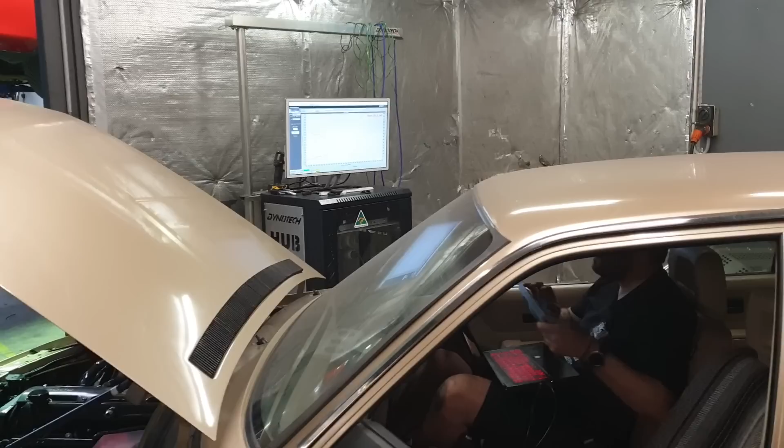That's more than it used to make. She's lean.

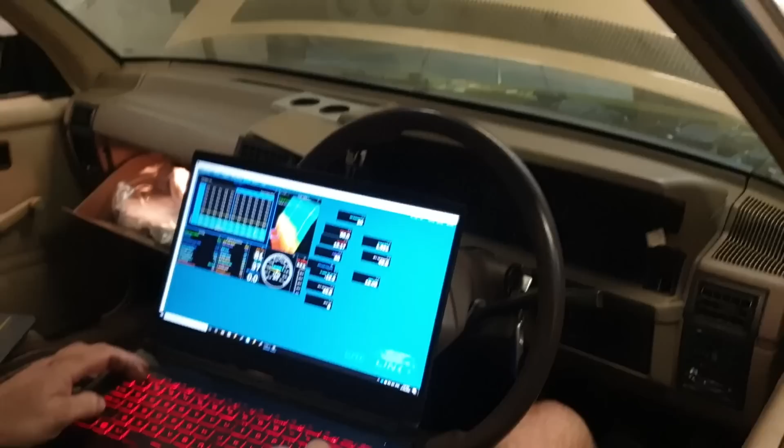Something's hitting under there, right? You hear that?

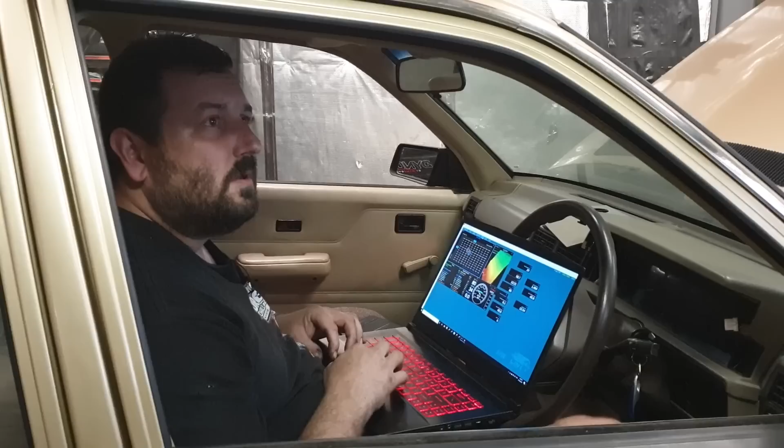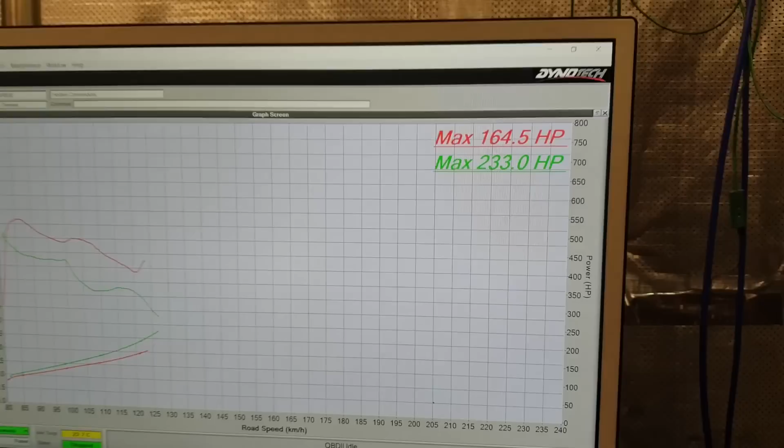What the hell just happened? I think it's like at 14 pounds. Jesus Christ, I didn't expect that. What the f***? I just shit myself.

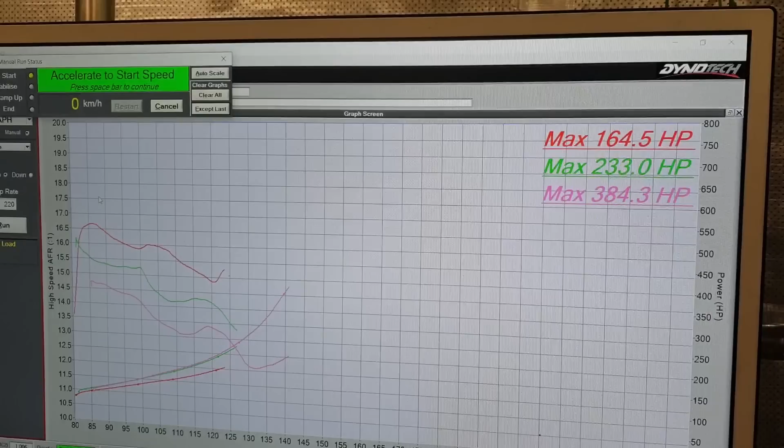Must have like 18-pound springs in it or something. Shit, lean eh? Where the f*** was that going? That was going places, don't worry.

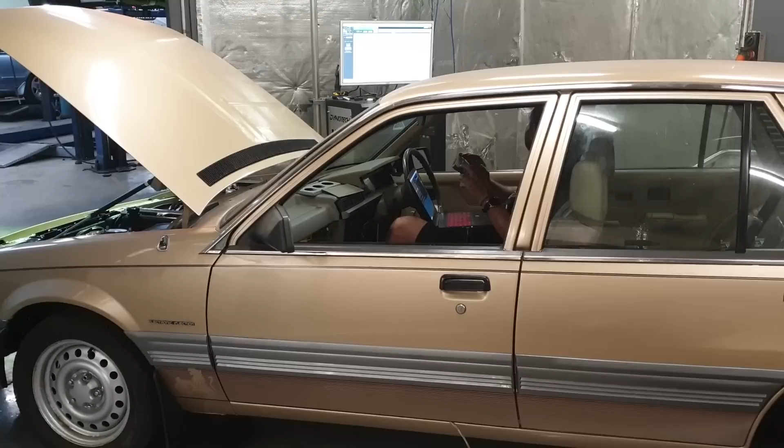Running out of numbers on the map, so I'm just having to shuffle some shit around. It's starting to lean, you know, like - you better go. Only a half one.

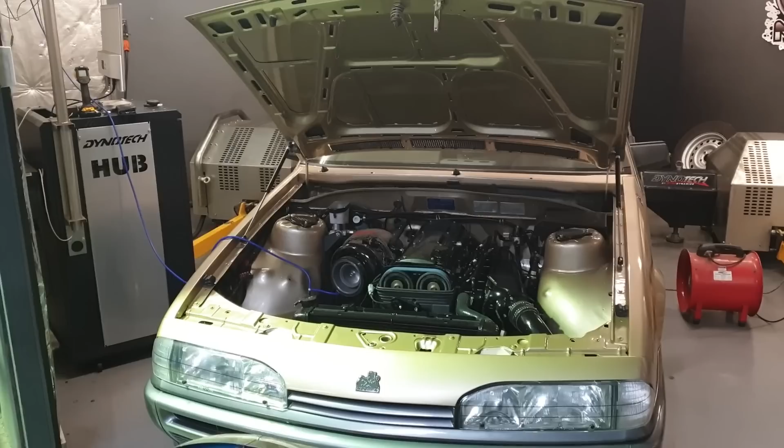I don't know where that's going. Where? Oh, it's stable at 22 pounds. I want to just put a bit more dip in the ignition curve there. It's going places, eh? It is.

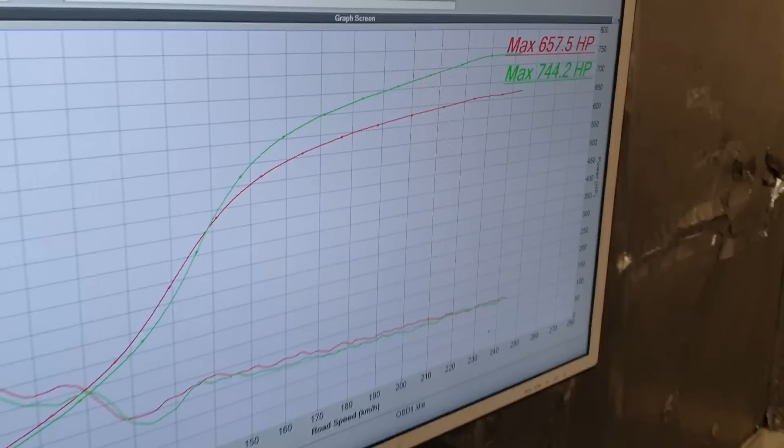That's 22 pounds. 22? Are you f***ing kidding? F***ing serious? Jesus.

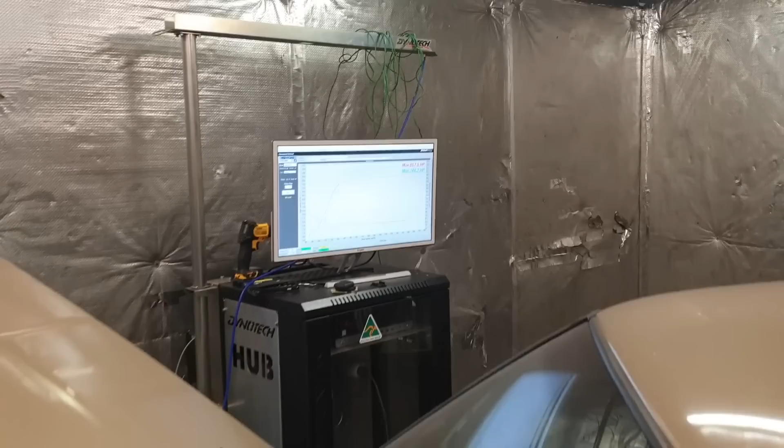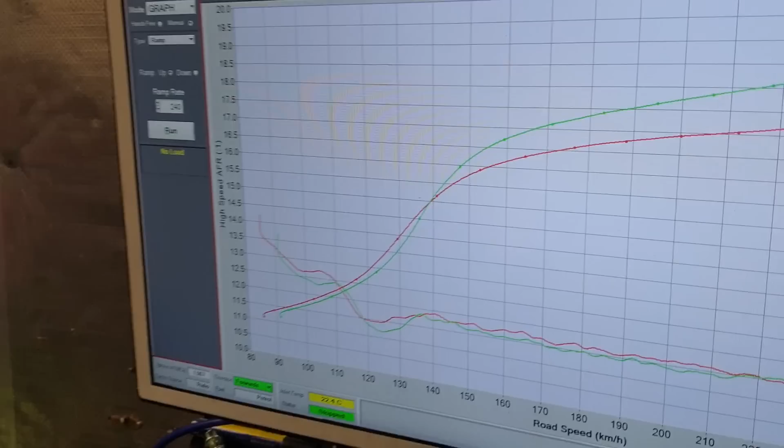What's that? It's not turning anything on. You almost seem disappointed. I'm going to have to bring the boost in a bit slower because it's just smacking the converter that hard. Oh, okay, 22 pound. Sure.

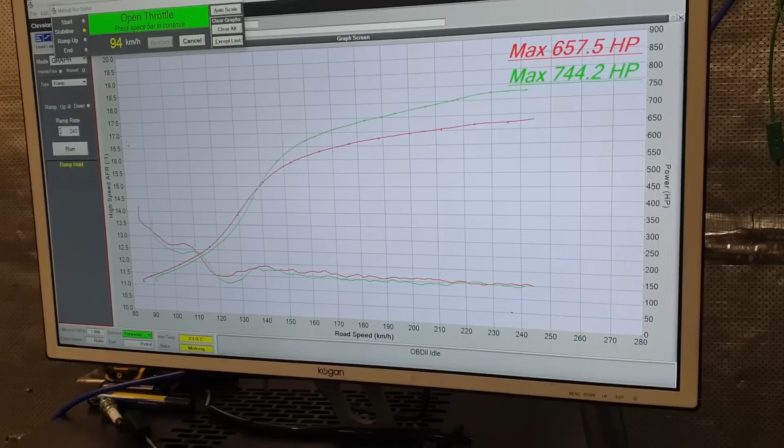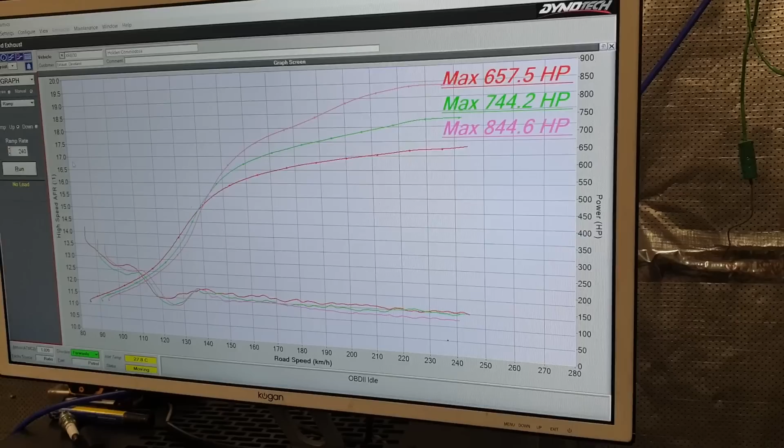Kidding? Shit. Oh, shit.

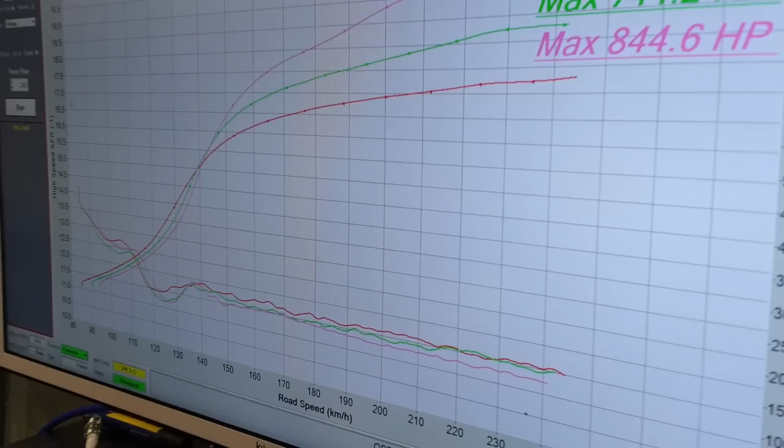How much? 27 pounds. It even hit my target air fuel ratio in open loop, and I brought the boost in slow. I don't want to fucking break it.

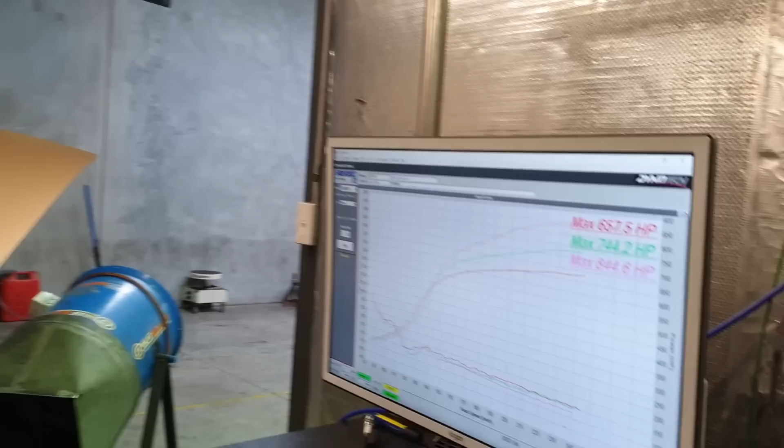That's hilarious, man. Take a log and then might leave it because I don't really like to beat it on the Supra. Oh, that's why we're pulling up.

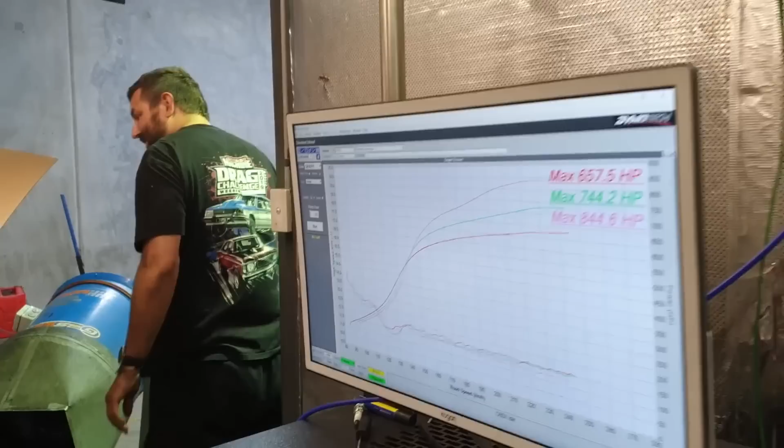Yeah, holy shit. Get back here, you little shit.

Alright, so after all that rod knock, I've caught that little slippery sucker of a rod. We cut it up into little chunks and put it back in the oil cap and kept going. And got to 844 at the tyres. We didn't really intend for it to go there, and it didn't need much boost to do it, so it's pretty efficient. Yeah, I've got nothing.

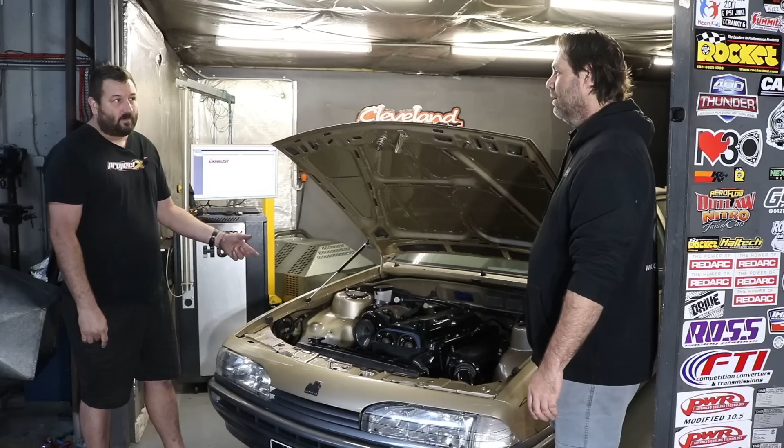At the end of the day, it's a completely stock NA engine. It's got stock ring gaps, stock pistons, ARP rod bolts. It probably would go to 1,000, but it could also come apart as well, so that'll do him for now. That's plenty for a street car anyway.

I got the boost sort of coming in, not all at once, and letting it eat a bit up the top, so it should do it pretty safely.

That noise you're all going on about, it's actually the 1350 uni on the tail shaft not having enough clearance for the bolts. We've already got cut down bolt heads in there, but as you decel and the diff moves to a certain location, it just touches. It sounds bad, but it's not. Sounds worse on camera actually, because the microphones seem to pick it up worse than it is.

Yeah, so I was hearing it every pull, I was making comment about it every pull. Outside I could barely even hear it. I didn't care, it's not my problem. Wow.

All right, so what's next? Well, not the Supra, because that sucks. Fair enough. But there's heaps of little bits and pieces to do to get it on the road.

You've got to put your little tanky things in. Yeah, we've got Dave from 180 Fab finishing off the tanks. They're pretty much mostly done, so you'll probably see them next time we see this.

I even did a trans brake test, I don't know if you videoed it or not. Did you see that? No, I didn't video it. Yeah, we missed it. It's on the two-step at 5200 in about 3 seconds. Yeah, it comes up, so it's going to work.

That FTI have got those converters down pat now. Yeah, it's all over it. And this thing didn't even breathe at him - no, didn't even have breathers on it, didn't even put any oil out, not even a mist out of it, which is because of TJ.